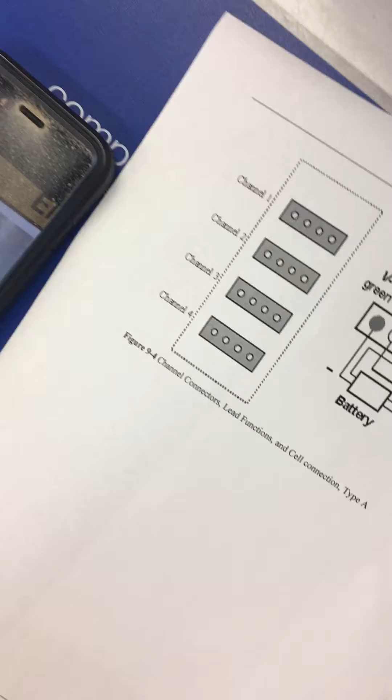Picture of it, so now we can. Right. So go ahead and set them up like this, but these are the correct ones. And so let's get our cell over here. Walk off with it, right? Yeah.

Doesn't matter which one. I also want you to know you could apply current and monitor voltage. The reason why I did this was sort of more of a practical thing, that I don't want a bunch of current applied without monitoring it closely.

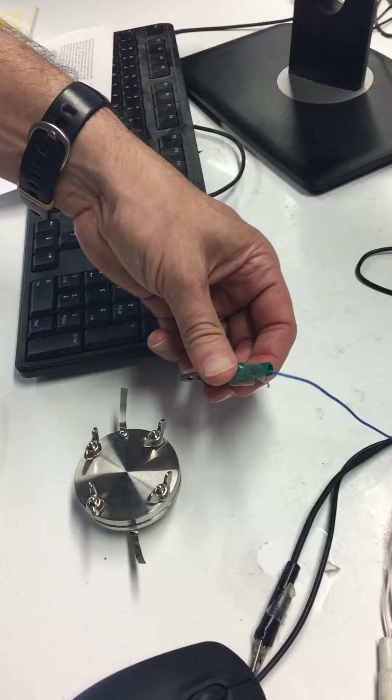So we're going to put negative voltage and negative current leads on one side, which is the green and the black. The black is our negative current, the green is our negative voltage. And for this measurement, we're going to put the voltage on the outside because we're applying it on the outside. Okay? We're going to measure current. It may make a small difference, but I'm going to do that anyway.

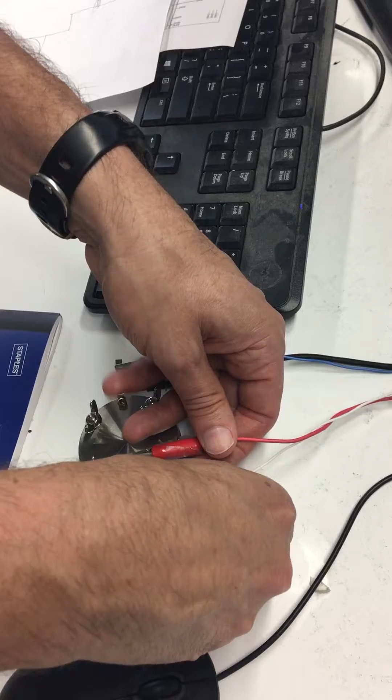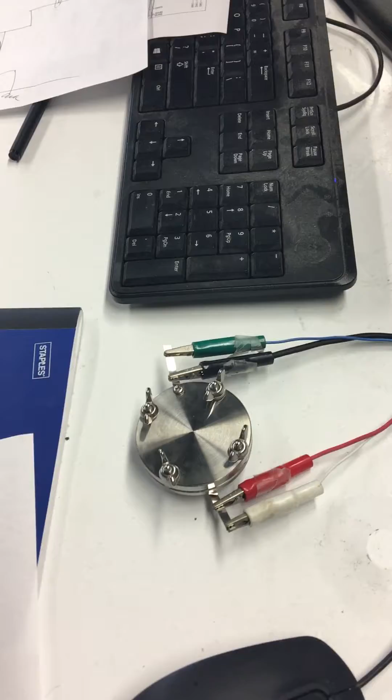On the other side, we're going to put the white positive voltage lead and the red positive current lead on there. And it doesn't matter which one is which because it's completely symmetrical. Just make sure you've got good connections with the alligator clips. Okay, we're 21. Okay. Now we've got our cell.

So the red light is on. It's making a measurement. Now we can actually read in real time what the voltage is. We told it to apply plus 100 millivolts. You can see right there, it's reading plus 100 millivolts. And there's our current, 0.3 microamps. We're reading some current. It's fluctuating, right?

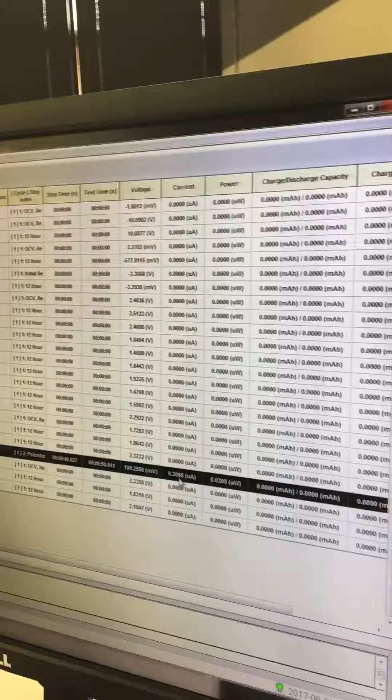We're going to get a readout of this. You can see it's going down. Okay. And we've got our current. And fortunately, we picked the right range in terms of low range because it's pretty low current. Okay. So it seems to be fluctuating around. Remember, the cell wasn't that good. We had a couple of issues with that.

But now it's on step 2. You see this 2 number, that tells us it's step 2. Step 1 was rest, step 2 is potentiostatic, so we stay there for 3 minutes. We're 57 seconds into this measurement, so we got another 2 minutes to go, and we're fluctuating around there. So I'm gonna move this thing a little bit too.

I think this is the monitor control window. We have the batch file and schedule files, and those are the 3 critical ones. I can close this. I'm going to leave this monitor control because I don't want to turn this off. And there's another program here called Data Watcher, and this allows us to actually look at the data in real time. It'll save it, but I could see the data, and I just want to plot it in a way that's a little bit easier.

Remember how to do this. I think it's going to be import results data. I should be seeing the data that I am collecting, and I don't know if I'm in the right folder or not. You move the date modified and look at the most current. There it is, right there.

Okay, so let's see. I'm going to open that, and then I have to set the X and Y axis on here. X-axis should be test time. Y-axis is going to be my voltage, okay? I'm applying voltage, and then a Y2 axis I'm going to put as current. Now you can see how noisy this is, and why do you think it's so noisy?

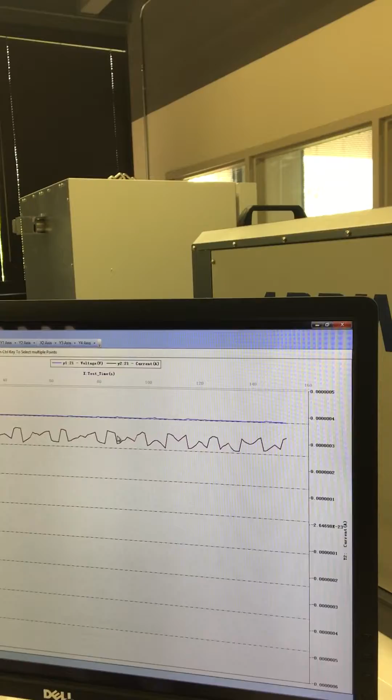Just a lot of current fluctuation. It's moving too much because it's inconsistent. Possibly. Bad connection. All those are possibilities. I want to think that we're pretty close to, maybe, I don't know if we're highly accurate. So there's a couple possibilities. We're pretty low current here. So I don't know if this is too low current for us to measure very accurately using this measurement for this particular material. Okay, so it's possible, I would probably redo this with a better cell.

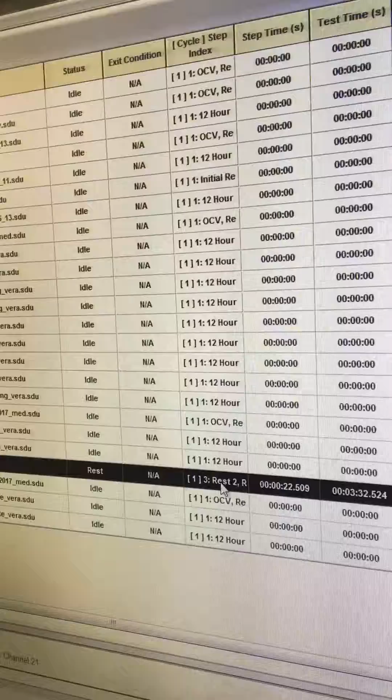But we now stepped on to step 3, which is rest. I think we told it to rest for a minute, and then let's go and do another negative current, just to see what that's going to look like. Now you can see that, you know, this is a very ugly measurement. I think there's a way to do this real time, but I don't know if it's import data.

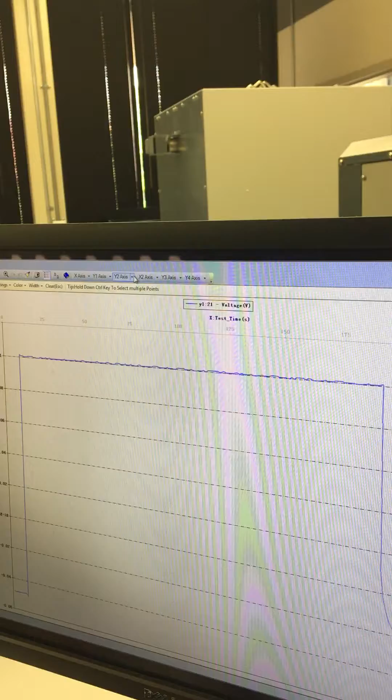Let me try this again, because I think there's a setting, and it's been a while since I did it, so I can't remember. Oh, here we are. Well, that's the voltage, and then the current. Again, you can see that. Let's see, is it doing it in real time? I think it stopped it. There's some setting in there. Anyway, so we stopped our current.

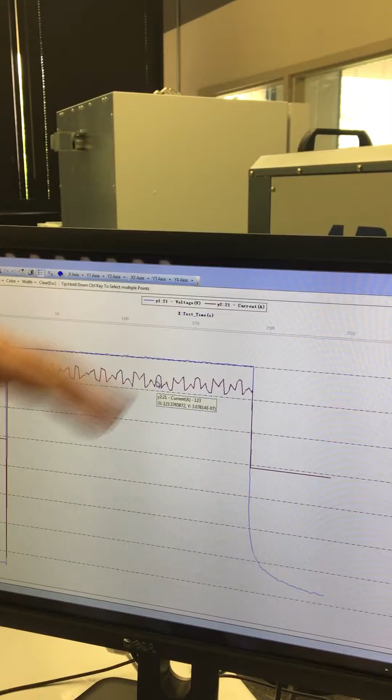I don't know. It's worth checking what the current resolution of the instrument is, because it may be noise level of this instrument. We may have to go to the other one to do better, or the titanium itself may be too low. The other thing you can do is bump up the voltage a little bit, right? You could certainly bump the voltage up. But you have to be careful not to move out of that linearity range. Yeah, so I don't know where we are on that.

Above, I don't know. You'd like this as a good range, but it could be that we can still read a current here, but it's pretty low, right? Obviously there's a lot of noise here. But just for the heck of it, you can try, and you can pick, but I wouldn't use this as reliable data. This is too noisy. We don't see a big thing down here, but this data is too noisy, and probably the first thing is remake the cell, then retest it again.

But you know, the method works right now. The challenge is, it looks like to me we're likely approaching the current resolution of this particular instrument. I don't know yet, but I'm concerned about that. So that means you can bump it up a little bit. I wouldn't go more than ½ volt, just to see. If you want to run this one again with a ½ volt just to see what happens, you can.

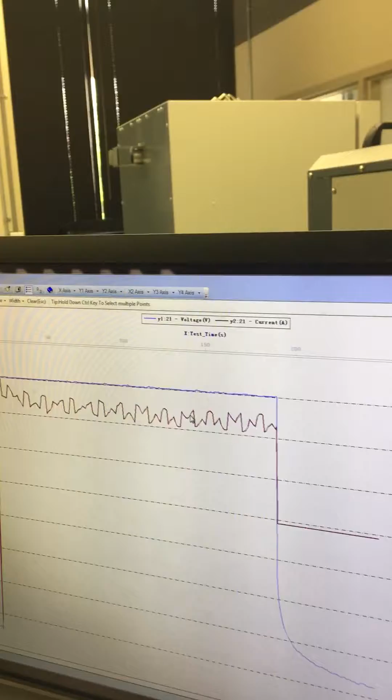But then what we do is we make sure we're in a linear region, and once we have reliable data, we just pick whatever current we have that was steady state, right? If it was steady state current, we expect maybe a little bit here if there's some kind of ions. Although this Degussa, I don't expect to have much ion conductivity, other than relative humidity adds a little bit of a proton conductivity, probably from the water at the surface.

So we should have a nice peak here, and then we would take the steady state region of our current, and then use Ohm's law to determine what the resistance was, right? So let's see. Let's go back to our.

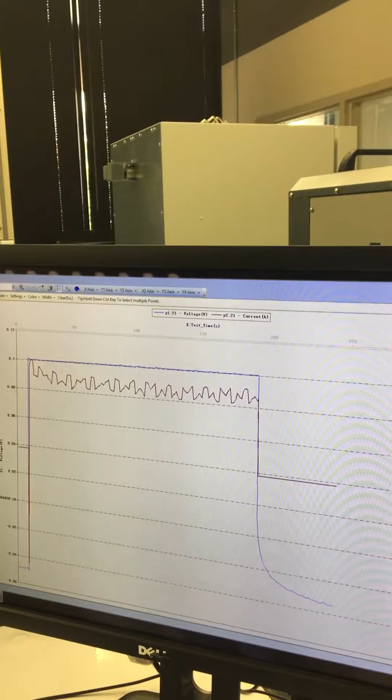Back to our data. We're now on the 4th step here, so it's applying. It's doing exactly what we told it to do, which is negative 100 millivolts. It's going as close as it can, right? And you can see this is getting down to 0.02 microamps, and so we're below not only just 1 microamp, 0.1 microamps. So that number makes me think we're real low. This thing's not that great.

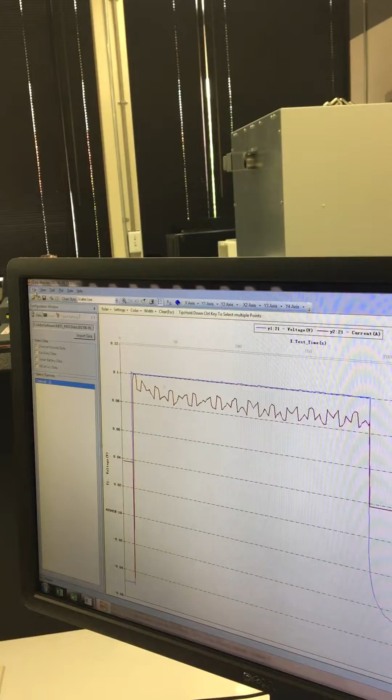Now the other thing I want to look at is I want to see if positive and negative would be about the same number, right? They should be, but it shouldn't really matter. We shouldn't really have to do it both directions, but we decided to do it for the heck of it, right? Let's go back to this data. There's a setting to be able to do the live data. Yeah, but I can't remember what it is.

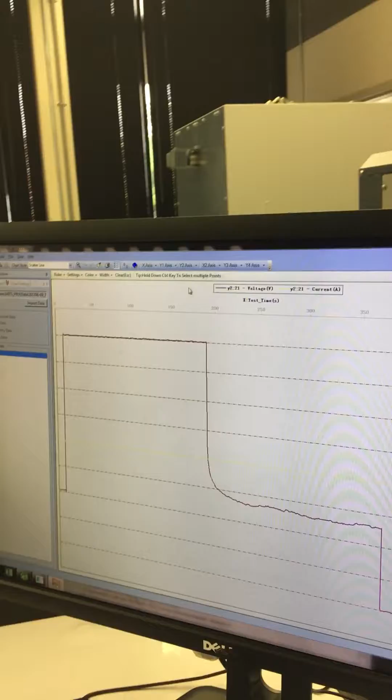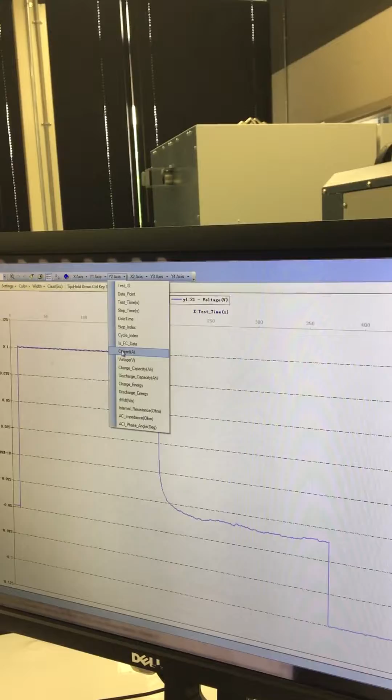And then, so, oops. Voltage. We have, there we go. Uh-oh, I'm gonna reload this. Oh, it's definitely acting funky here, so I don't trust this. See how it's, okay. You see how this one didn't show me? This should be 0 current here, but then on the negative side, it only went to this range, right?

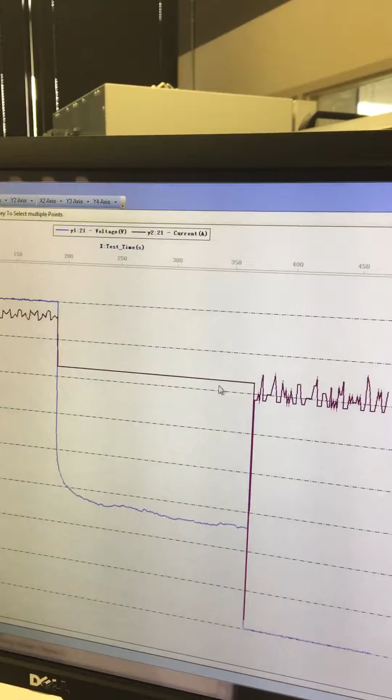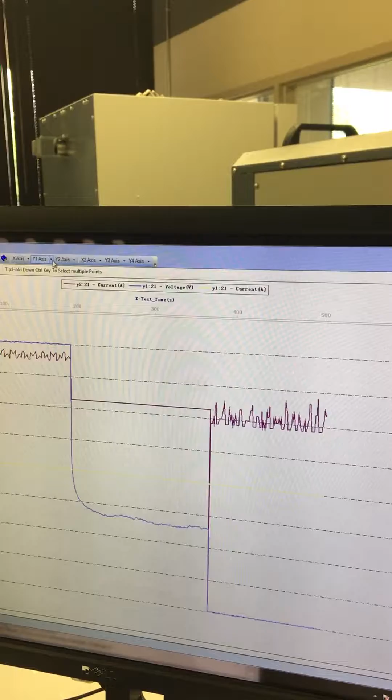See that? Mm-hmm. And these should be kind of symmetrical. It should be down here, right? Well, no, it should be right here. So you're looking at two regions. Here. If we take this off, we can just plot the current here. Yeah, let's, just so it doesn't. We'll just look at the current instead of the voltage.

See, here's 0. It went up, stopped, went back to 0, but then we put it positive and it spiked out here and then it didn't go here. So this is either, you know, some issue. It may be, and I'd probably try to redo it one more time and bump up the voltage a little bit. Otherwise, we're going to have to go to the other instrument to do it. Okay.

And then we want to clean all the parts with the isopropyl. Yeah, clean it all out. Take it apart, clean it out, and make sure to not... Drying oven or anything? No? Don't put it in the drying oven. Just let it air dry. Okay. It won't hurt it, but I'd rather leave this set up and away from other stuff. There's too many parts to lose, so keep it down there.

Okay. There's a special program that you got to use to import this, or you can do it in Excel, but you have to have a macro on it. So this particular version of Excel on here has the macro. We need to put the macro on the other one. So you got to go to Excel, and then I think it's in add-ins, and you have import data, right? We go to import data, and then we're going to pick that sample, where we were at, and then we'd have to find where it saved it.